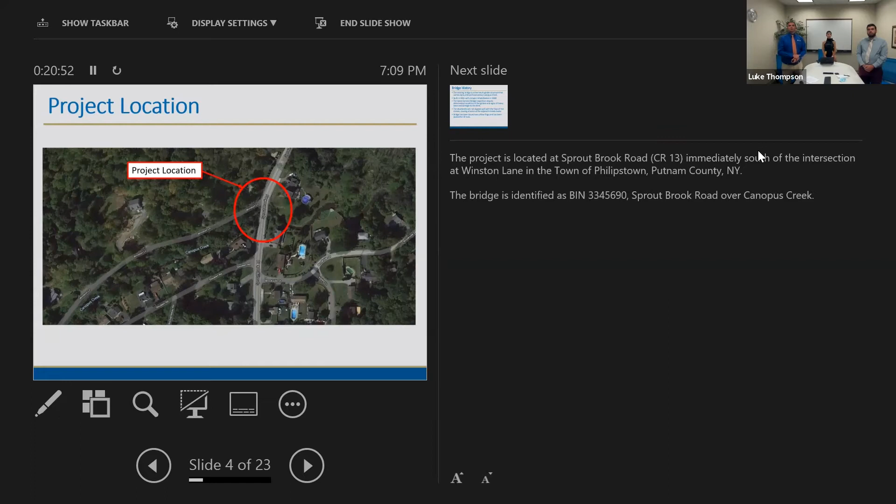So the project is located at Sprout Brook Road at the intersection of Winston Lane in the town of Philipstown, Putnam County, New York. The bridge is identified as BIN 3345690, which is Sprout Brook Road over Canopus Creek.

So as mentioned, the existing bridge carries Sprout Brook Road over the Canopus Creek, currently a 27-foot long steel multi-girder superstructure with reinforced concrete deck on existing concrete abutments. Originally built in 1935, it last underwent a major rehab in 1958.

The latest bridge inspection report from April 2020 indicates some pretty severe deterioration in multiple areas of the bridge. The underside of the concrete deck is spalling and the reinforcing is exposed over approximately 80% of the deck area. The exposed rebar is starting to corrode. The asphalt wearing surface on top of the deck exhibits cracking over 50% of the roadway.

The steel superstructure consists of 10 girders, 2 of which were added to widen the bridge, and multiple girders have corrosion holes in the web, with one girder experiencing up to 60% section loss. A yellow flag, which is a structural flag issued by the bridge inspections team, was issued for that condition.

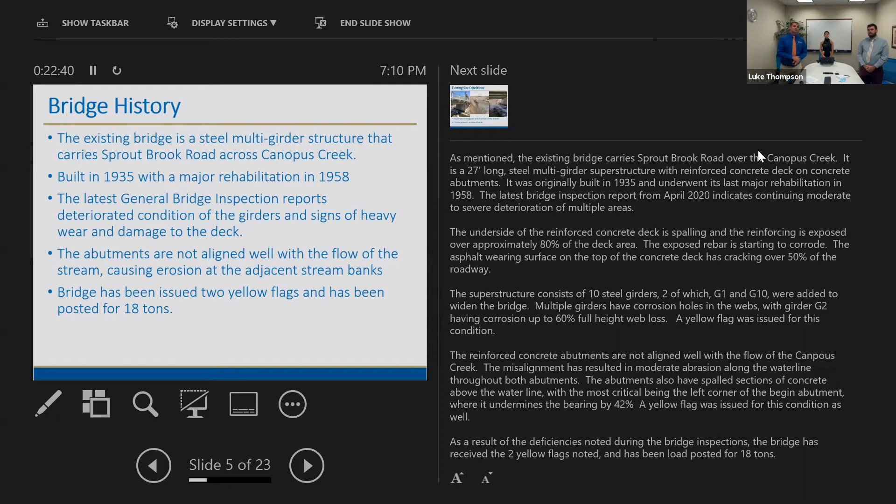The reinforced concrete abutments are not aligned very well with the flow of the Canopus Creek, and that misalignment has resulted in abrasion along the water line at both abutments. They also have spalling above the water line, significantly at the left corner of one abutment, where it undermines the bearing by almost 40%, and a yellow flag was also issued for that condition. So with 2 yellow flags issued and a severe section loss of the bridge, it is currently posted for 18 tons for safe vehicle traffic.

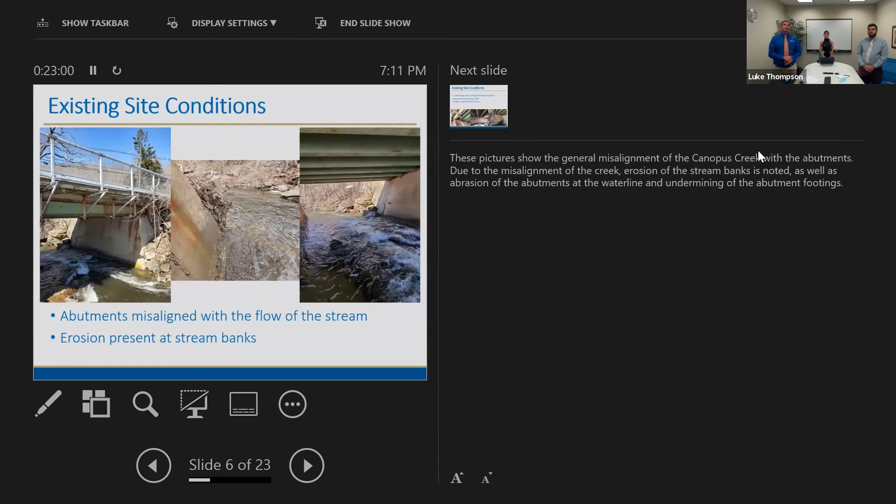So here's some existing site conditions. You can see how the stream is somewhat misaligned with the abutments, causing erosion of the stream banks, as well as abrasion of the abutment concrete and undermining of the abutment footings along the edge of the foundations.

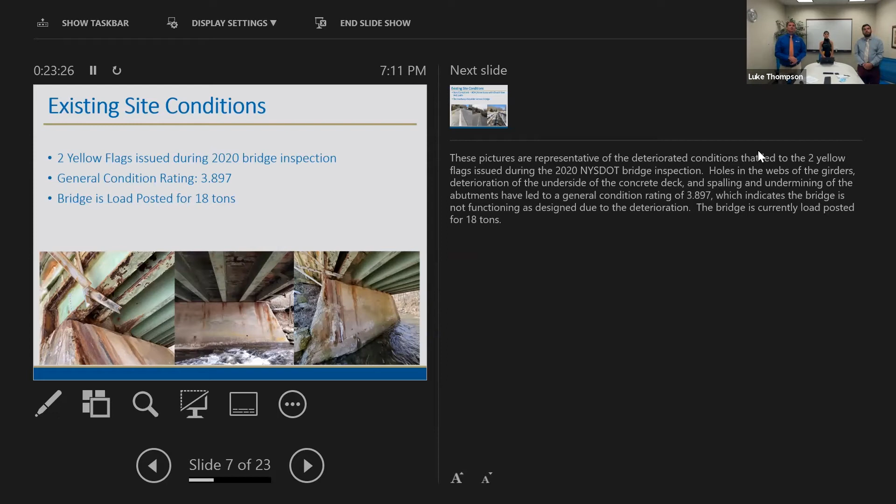These pictures show the issues with the structural yellow flags issued during the bridge inspection: holes in the webs of the girders, the deterioration of the concrete deck, and overall condition rating is now 3.897, which indicates the bridge is not functioning as designed due to the deterioration, and it is currently load posted for 18 tons.

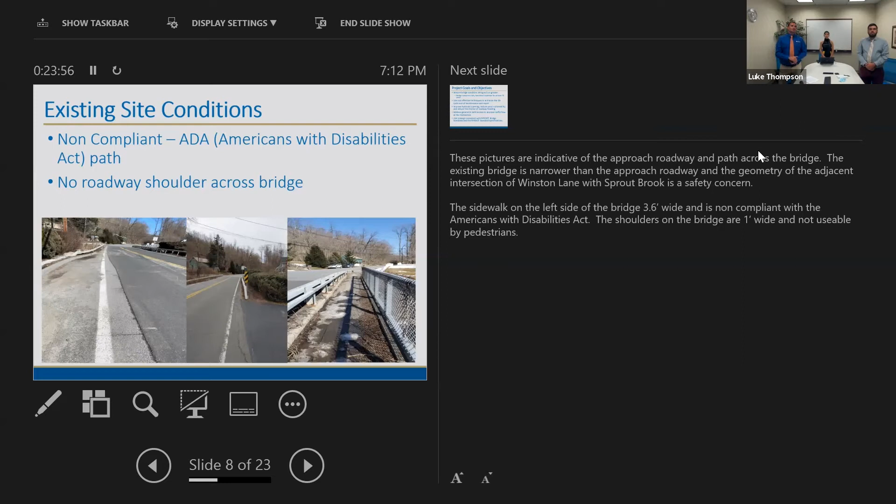On top of the bridge, there is a pedestrian path, but that path is not ADA compliant, meaning it does not comply with the Americans with Disabilities Act. The bridge is narrower than the approach roadway, and the geometry adjacent to the intersection of Winston Lane is also a safety concern. The shoulders on the bridge are only 1 foot, and so they are not usable by pedestrians in this configuration.

Based on this, our project goals are as follows. We want to restore the bridge to a condition rating of 5 or greater so that the bridge remains fully functional for 75 years. We want to use cost-effective techniques to minimize life cycle cost of maintenance and repair, improve the hydraulic opening and alignment of Canopus Creek, which would reduce the scour vulnerability and mitigate the chance of any roadway flooding. We want to address the geometric deficiencies at the intersection of Winston Lane and Sprout Brook Road, which will improve traffic flow and safety at the intersection. And we must use a design consistent with the New York State DOT standards.

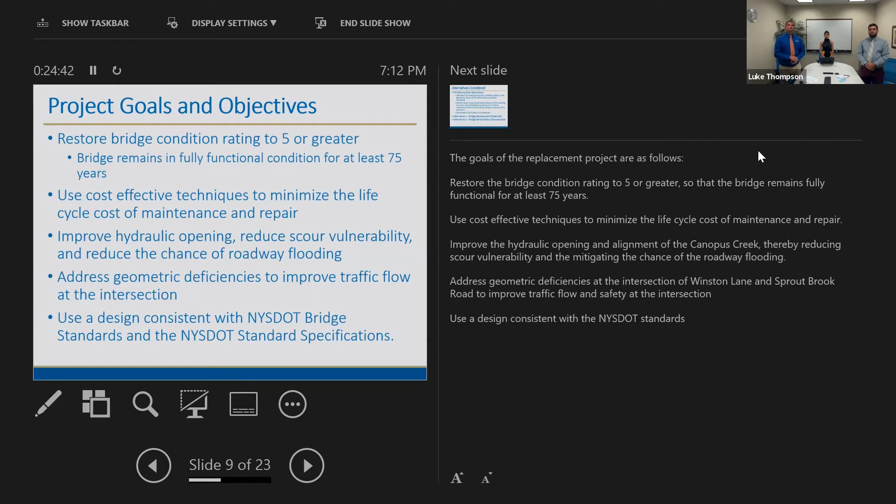So we considered 3 alternatives in our design. The do nothing or null alternative is what we use as a basis of comparison. With the do nothing alternative, we maintain the existing structure, roadway, intersection, and stream geometry. None of the deficiencies would be addressed or corrected, which would result in continued deterioration of the existing structure, ultimately leading to further load posting restrictions and possibly eventual closure of the roadway at the structure. Due to the inherent issues with the do nothing alternative, it was eliminated from consideration for this project.

So then we considered 2 further alternatives: alternative 1 is a full bridge replacement, and alternative 2 is a bridge rehabilitation. We'll go through those 2 alternatives now to show you how we came up with our preferred alternative for a full replacement.

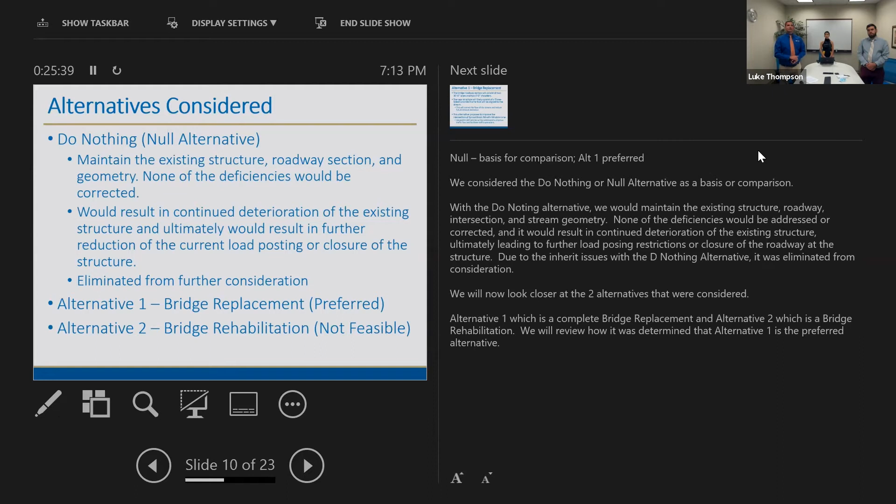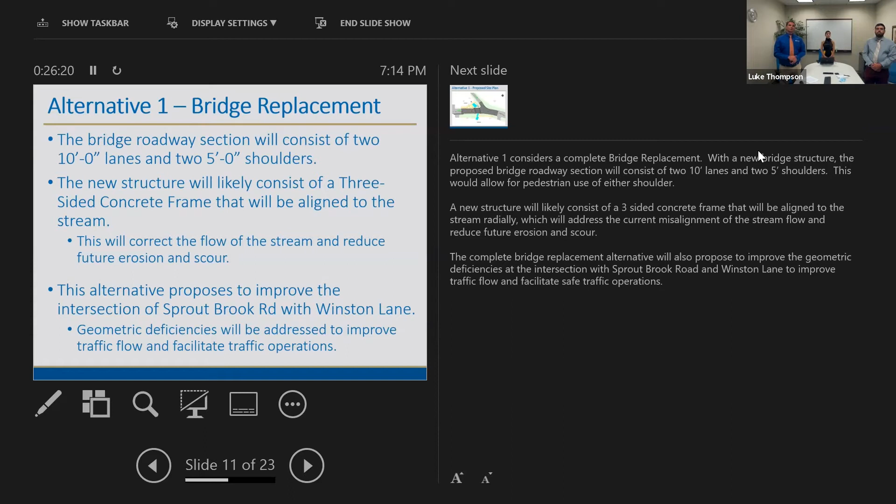A full bridge replacement is alternative 1. With a new bridge structure, the proposed roadway section will consist of 2 10-foot lanes and 2 5-foot shoulders, allowing for pedestrian use on either shoulder over the bridge and on the approach roadway. The new structure would likely consist of a 3-sided concrete frame, which we can align radially with the stream, addressing the current misalignment of the stream and reducing future erosion and scour. The complete bridge replacement alternative also proposes to improve the geometric deficiencies at the intersection with Sprout Brook Road and Winston Lane, which will improve traffic flow and facilitate safe traffic operations.

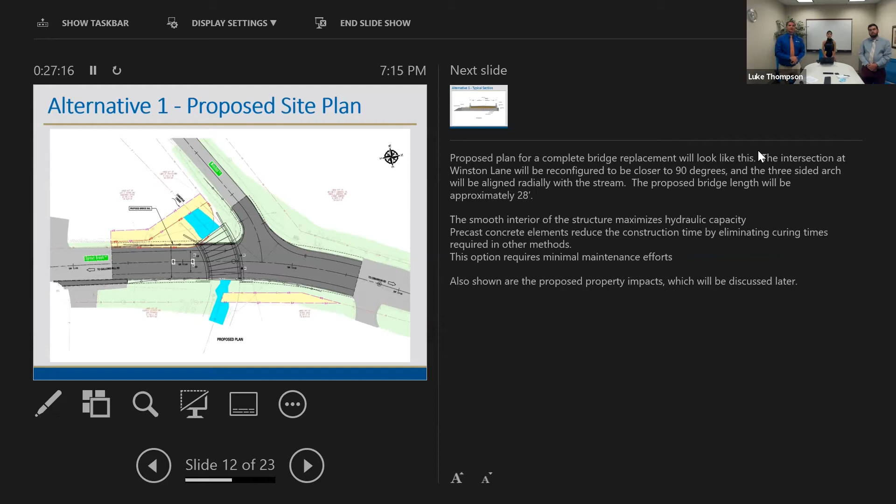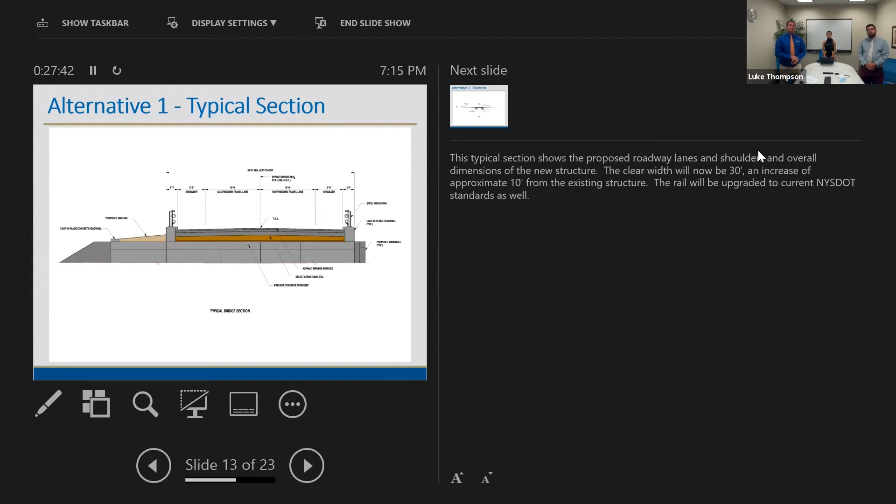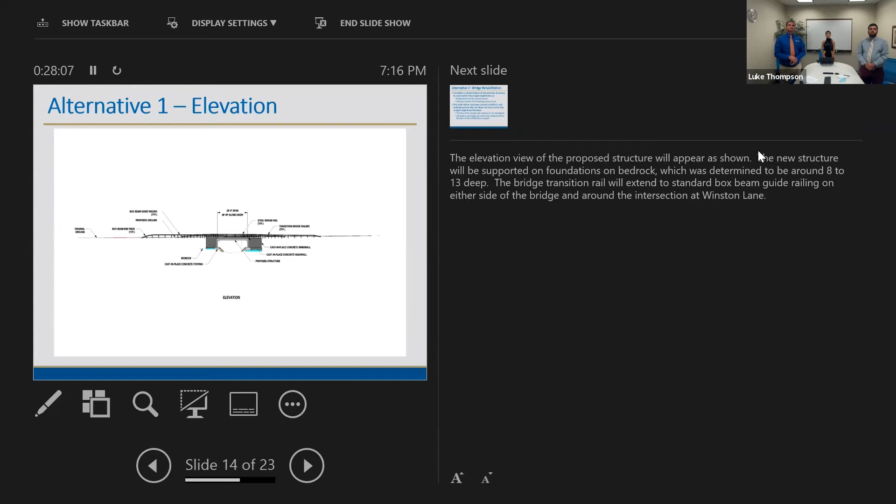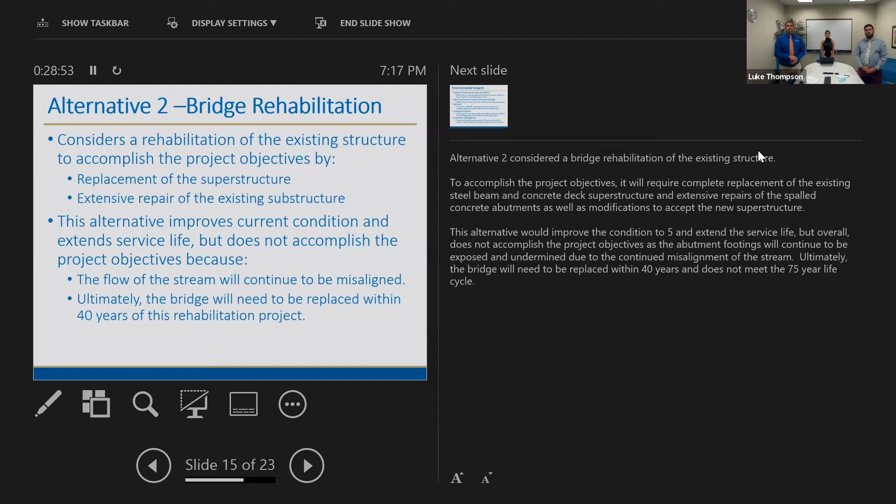I'll turn it over to Alex for some environmental impacts. Thanks, Luke.

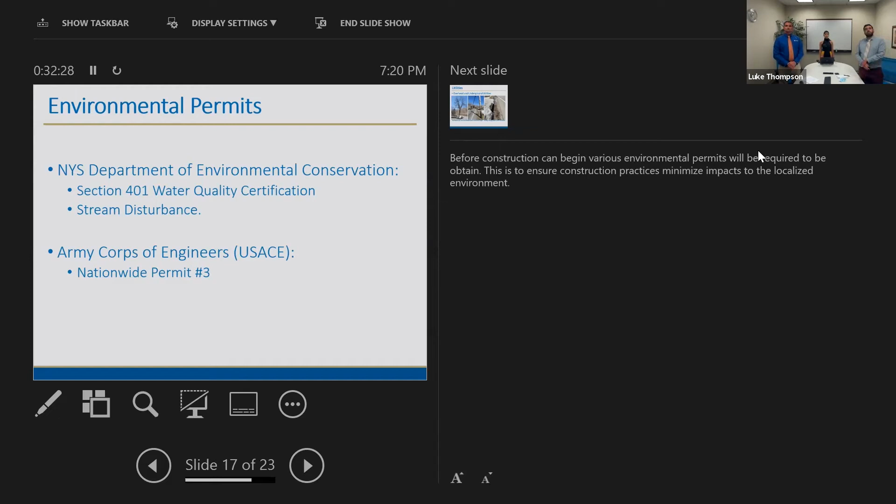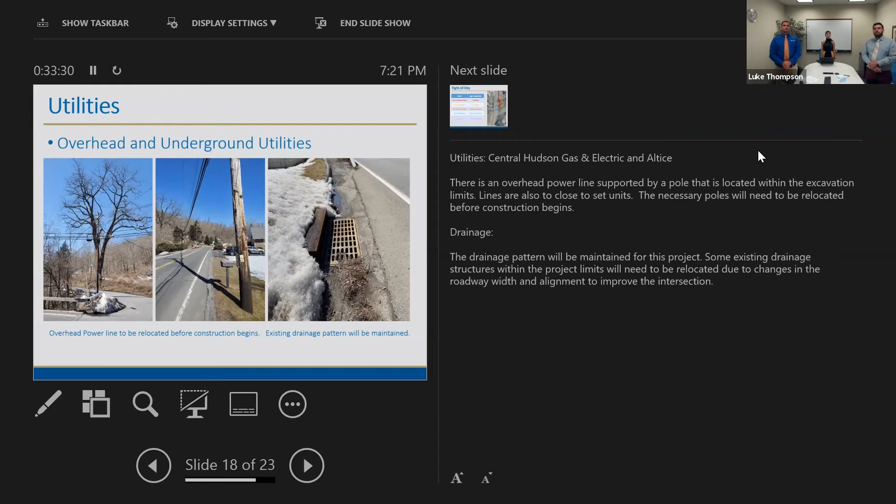Drainage in the area - there are a number of drainage structures and pipes just feeding the runoff from off the road to the creek below. This project will maintain the similar layout that's out there currently, but will replace pipes or upgrade structures as needed.

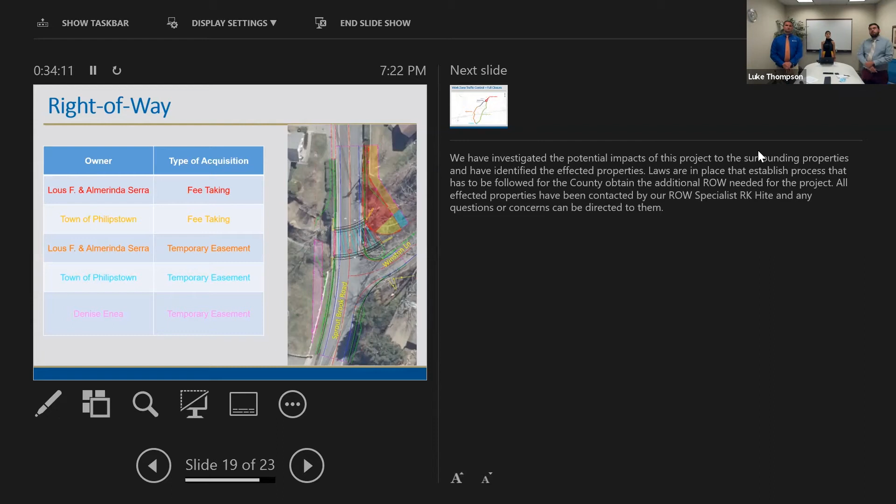We have also investigated the potential impacts of this project to the surrounding properties. On our slide here, you can see some of the properties that have been identified as being affected by this project. There are laws in place that establish a process that has to be followed for the county to obtain any additional right-of-way needed for this project. I believe at this point all affected properties have been contacted by our right-of-way specialist, RK Hite, and any concerns or questions about this process can be directed to them.

For construction, it's anticipated that a complete closure of the roadway will be done so that the bridge can be constructed in one phase. With the road being closed, we're going to propose an off-site detour to maintain traffic around the site. The proposed detour is approximately 3 miles long from one side of the bridge to the other, and will utilize Winston Lane, Highland Drive, and String Lane to reach Brook Road. The duration of the detour is anticipated to be approximately 3 to 4 months for construction.

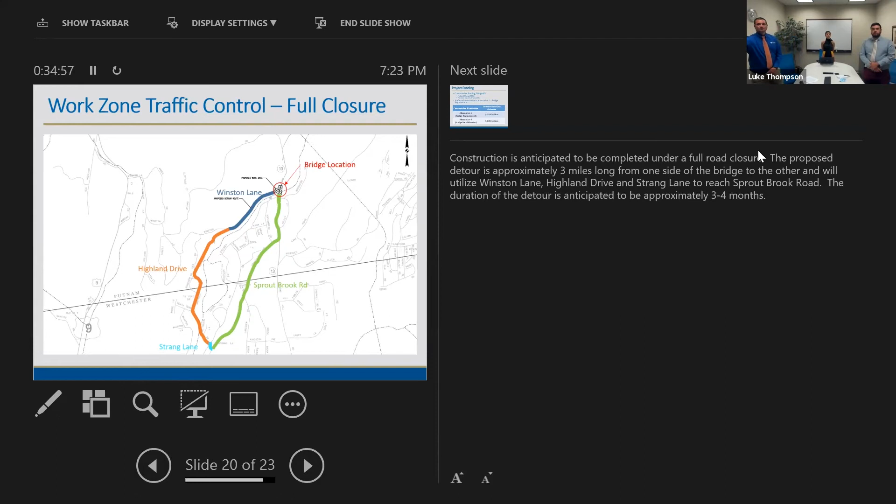Thanks, Alex. So as we mentioned, the bridge is funded through the Bridge NY competitive grant program. 95% of the funds will come through the federal government, and the county will provide that 5% match, and all the funds will be delivered through the Department of Transportation.

Alternative one, which is a complete bridge replacement, meets all the objectives, and so that is our preferred alternative. We did do high-level cost estimates for both alternative one and alternative two. Alternative one for the full bridge replacement is approximately 1.09 million, whereas a bridge rehabilitation would be 0.9 million.

So in order for the county to receive the federal funding reimbursement, all required steps must be followed from design through construction.

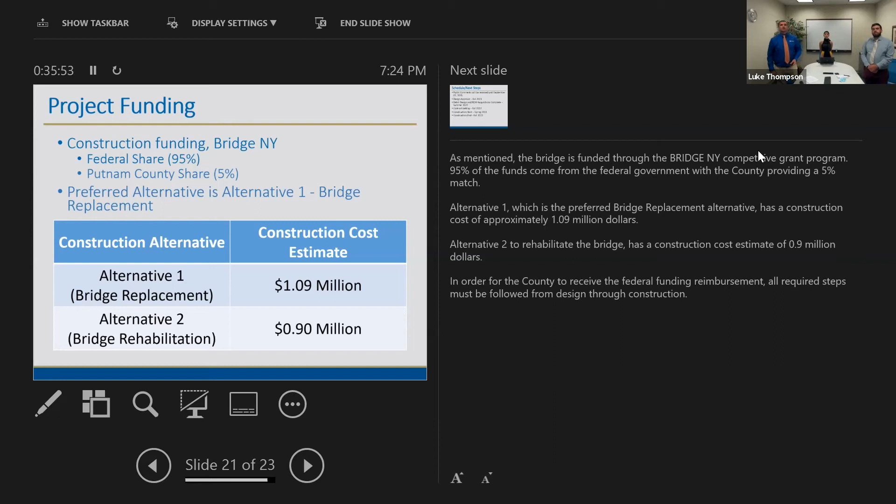Our next steps: we will take public comments until September 7th. We will review and respond to the comments and make any necessary changes to our design approval document. Right now we're between preliminary design and detailed design phases. Prior to the detailed design phase, we must receive design approval from DOT, which once we submit our design approval document, we expect to be within a month or two.

When the project moves into detailed design, the plans and right-of-way acquisitions will be progressed further. Permitting applications will be submitted. These tasks will occur up to spring 2022, at which point we will submit the project to DOT for final design review. After their review, the plans will be finalized in the summer of 2022, when the project will be submitted to DOT to obtain authorization to advertise the project for construction.

Construction letting is expected to occur in the fall of 2022, with construction expected to start in the spring of 2023 and completed in the fall of 2023.

So that concludes the technical portion of the public information meeting. An important aspect of this meeting is receiving comments and questions from the general public regarding the project. For people attending this meeting on Zoom, prior to the meeting, you're provided an opportunity to register as a participant and indicate if you are interested in providing verbal comment tonight.

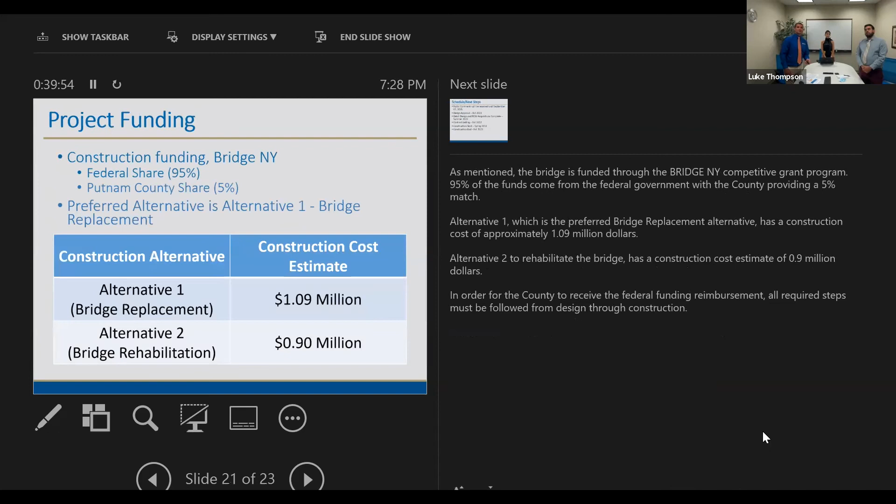Yes, we do have the property impacts. Let me go back to the slide with our property impacts. The impacts for the temporary easement are more so for construction access. The current bridge is pretty close to the highway boundary, and to remove that structure and get down to the footing, the excavation limits are anticipated to go over the highway boundary into the neighboring property. So there'll be some excavation near the bridge and then some construction access of the vehicles to that spot. At the end of construction, all the land disturbed will be filled in and regraded to the original grade that it was at, and it'll be reseeded and all vegetation will be established again.

If there's anything like a fence or something that was disturbed, that will be put back the way it was before. So with the temporary easement, the final outcome should be complete restoration of how your property originally was. And just to clarify, there will be no permanent features built in the temporary easement. All the permanent features will be in the county right of way. The temporary easement is access to build those permanent features.

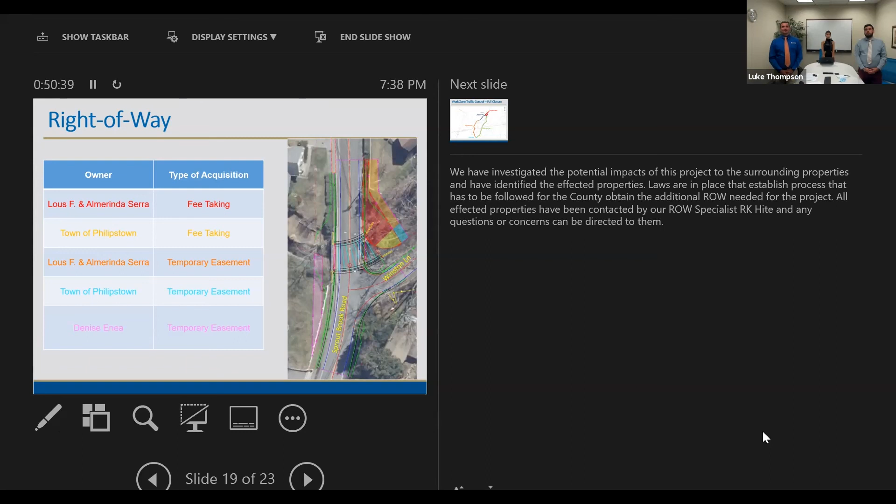One other question I have is if it's somehow broken, will it be fixed? But we won't have any water until it's fixed, as quickly as humanly possible. I mean, with water mains, you don't want to mess around. There are certainly situations when a water main is taken out of service.

Sometimes you'll see a water tanker come by and provide you with temporary water supply. That's a worst case scenario. I hope we identify where it is. It'll be on the plans, and the contractor will know it's there. We'll have notations about not breaking this pipe.

The poor old lady over here won't know what to do. No, don't break that pipe. The poor old man over in Carmel. Are there others? I did have one. Thank you, we have one more question.

So what's happening, you're going to widen the abutment on the bridge, realign it to the stream, which will cause the stream to flow better. That's the way it's supposed to go in theory.

What's happening then is you would actually be widening the opening for the stream. What's been happening with that stream over the past 10 years, I don't know if it was caused by beavers upstream or something, the flow has been greatly reduced, causing large land masses to develop on the sides of the stream banks, and pretty soon they're going to connect from both sides.